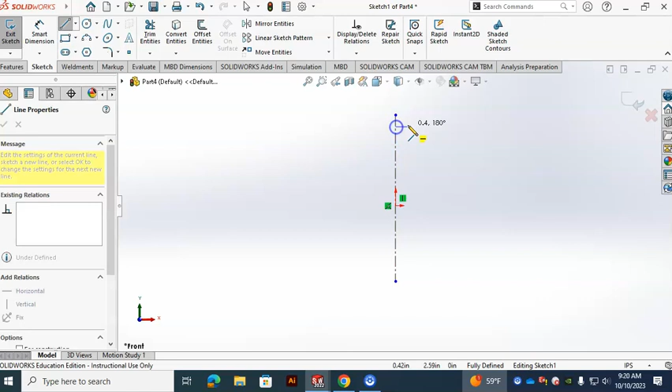Alright, first thing you want to do, front view, we're going to make a vertical line on the origin. We're going to put in a horizontal line for the parameters of the top and of the bottom.

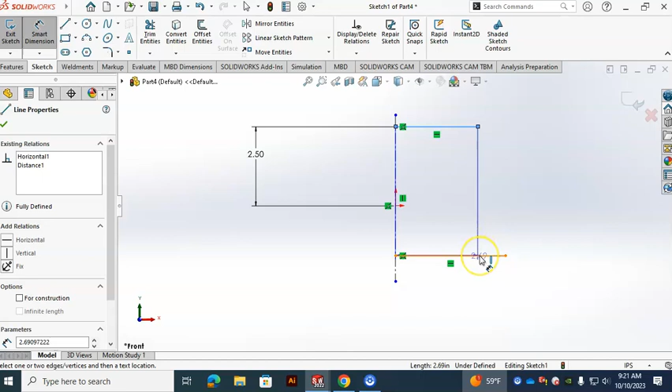And our dimensions, put this one up 2.5 from the origin, which will be the center of the circle here in a bit. And then this is the overall height of 5.125.

This here circle has a diameter of 3.25. Right? And then what I want you to do is place all the circles and then treat all these fillets

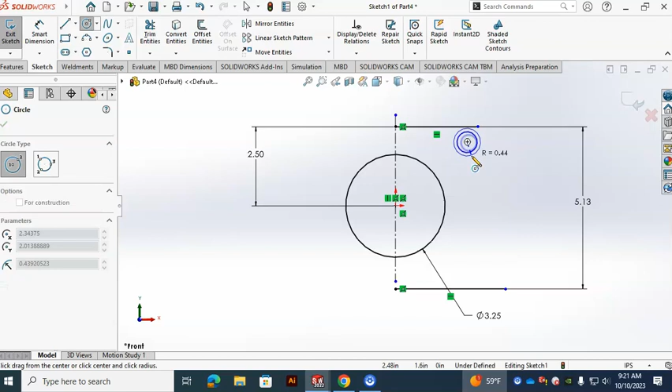as a 0.5 radius, but actually we're going to put them in as 1-inch circles. So you're going to have 1, 2, 3, 4, 5, 6.

All right, now this, and this are all 0.5 radius. But for now, we're going to make these all 1-inch diameters. We'll trim them out later.

I'm going to have to zero it out. The center point for this, it has it located. It wants this to be tangent. And then we will go measure over, since it's symmetrical, 3.5.

The inside diameter is 0.562. Now this line here needs to come out. It's going to line up with this, and we'll trim it out here in a bit and it'll make more sense. This part's all fully defined.

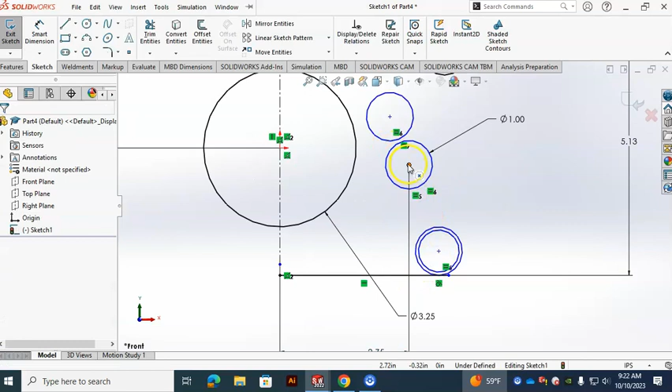Right? These circles, if you look down here, are going to be 2.749. Now the other circle didn't follow it because we haven't made a relation to make those vertical. So now they're going to be on the same vertical line.

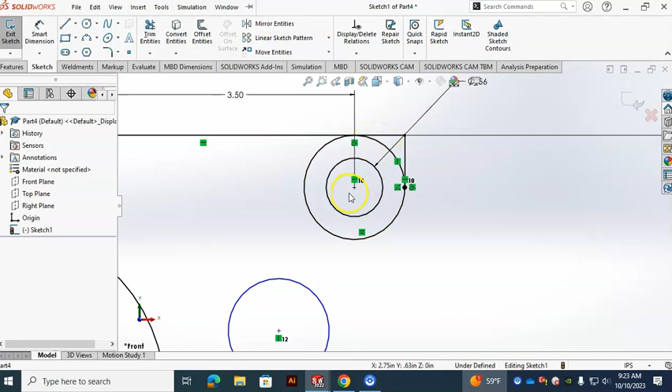Right? We don't have to put in this 0.5 because we've already made it tangent, and that's a 1-inch diameter. We will then measure from this center point to this center point, and that needs to be a 1.165. This one needs to be a 0.5.

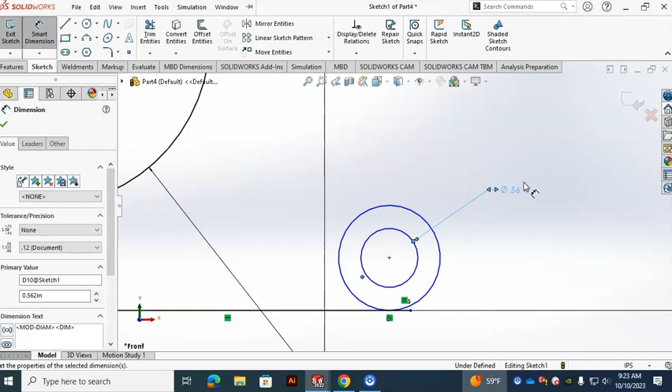Right? This one should be 0.562. It's tangent. This one's going to stop here. And the distance from that center point to this vertical line is going to be 4.125.

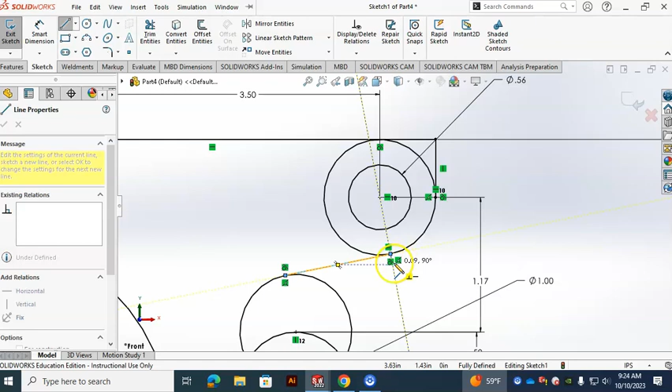Now we have fully defined circles. We are now going to make tangent lines. So now I'm in the line tool, and what I'm going to kind of do is just kind of graze that, and you can see it being tangent. When I do it that way, it made it coincident and tangent all in one stroke.

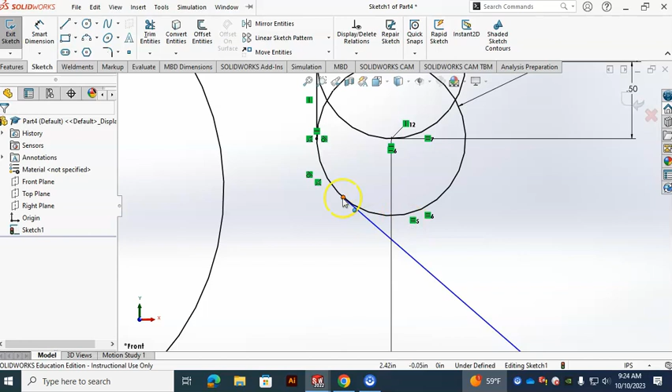These will be tangent from here to here. Then we'll see what we can do here. If we can make this one tangent. Doesn't look like it's going to let me do what I want. So we're going to have to, that one is tangent and coincident. This one is not. We're going to make that tangent.

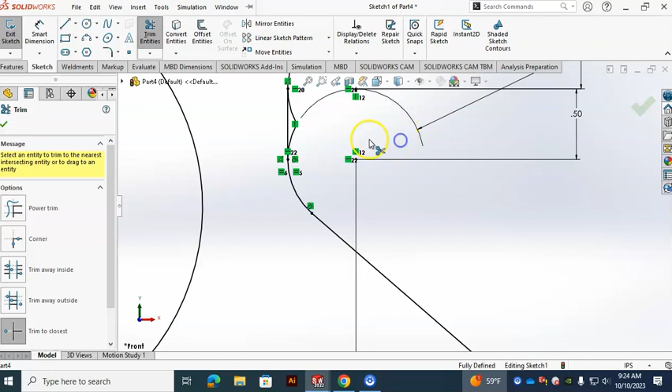And then with my trim tool, using the trim to closest, I click on what I don't want. I don't want that. I don't want that. I don't want that. I don't want that. And that needs to go, and that needs to go.

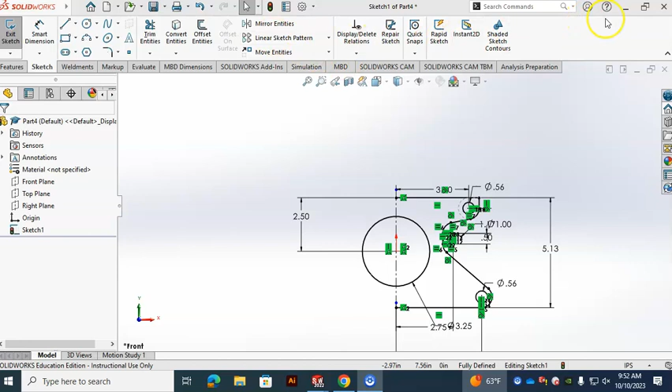At this point, I now can mirror this and have 90% of that drawing done. This would be a good place to run the mirror tool. Move that out of the way. Mirror about the vertical. Then you can window in all of this. And that'll get you to this point.

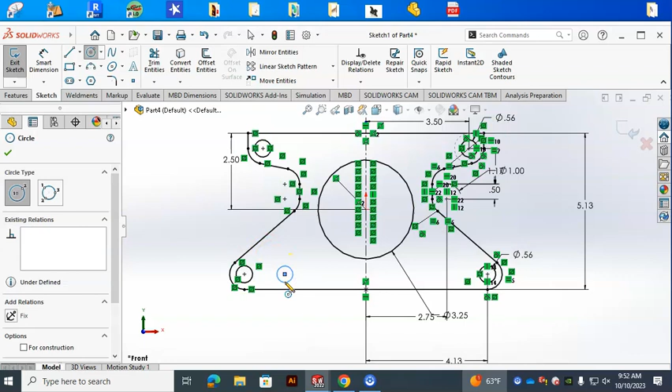Now you got to add a circle down here. We are going to smart dimension that at 0.75. And it has that listed from that center point to here at 1.812.

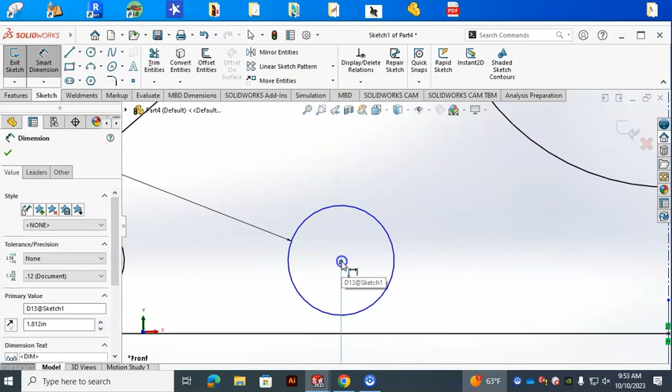And it needs to be, let's zoom in here, from here to here. Need to make sure I zoom and get that center point there. From here to here, they want that to be 0.562.

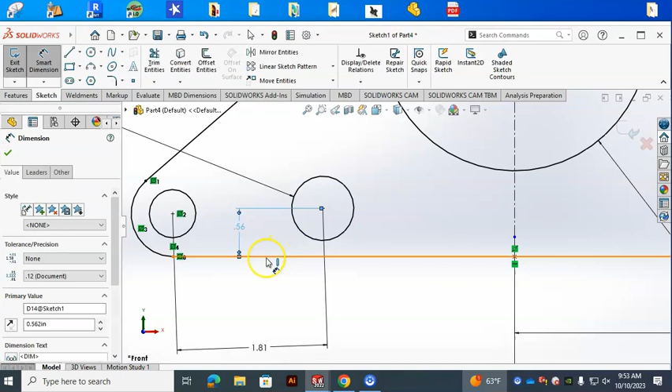Now that's defined. Now down here, we're going to do an offset at 0.125. Not a chain. And I'm going to go in that direction. And we'll turn that one back into a, some reason it wanted to make that into a construction.

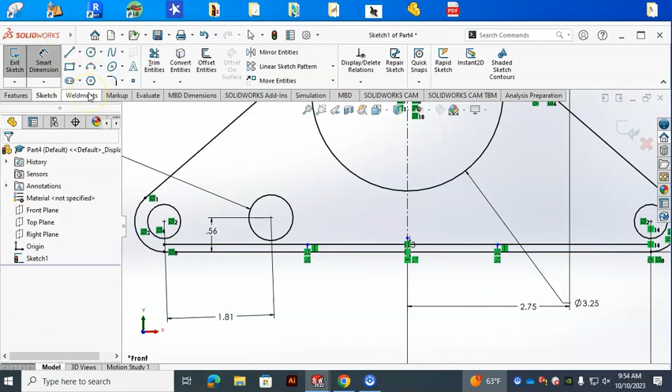There is a vertical line. We could have done this in the mirror as well. But the dimension for that is from here to here is 1.875. Same thing over here. Since we didn't mirror it, 1.875.

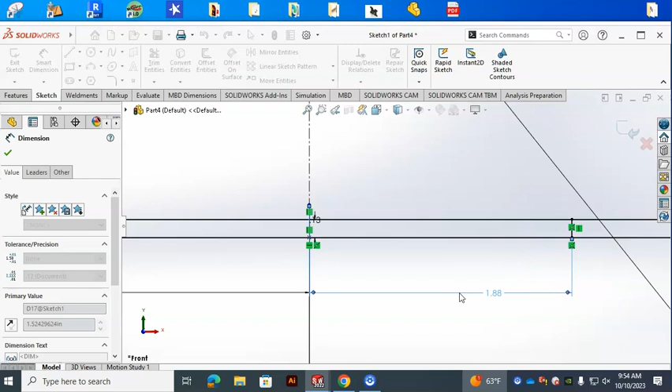And then I'm going to do some trim. I'm going to trim that out, and then I'm going to trim this out. And I'll just run this to here.

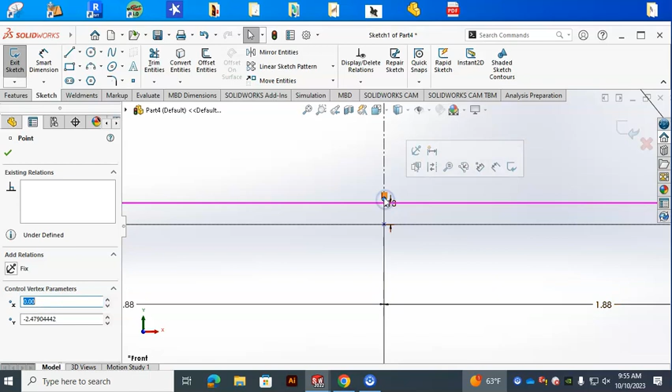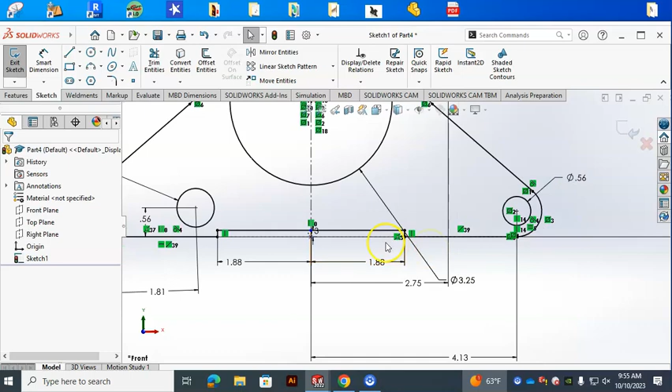So what I'm going to do here is I'll do a 3D feature fillet once it's extruded. To make this piece over here, I'm going to make a construction line or center line. Those are synonymous. I want to make that at 28 degrees.

I'm going to put a circle on that. That says a radius of 0.25, which would be a diameter of 0.5.

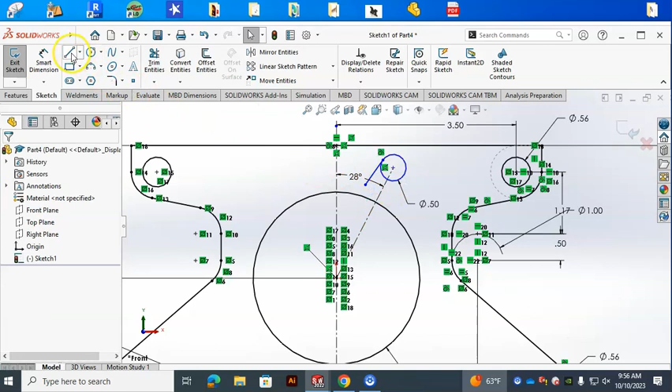This is how I'll do these. I'll come make sure that I have those lines on here. Make it concentric or coincident with the circle. Then I'll make these parallel.

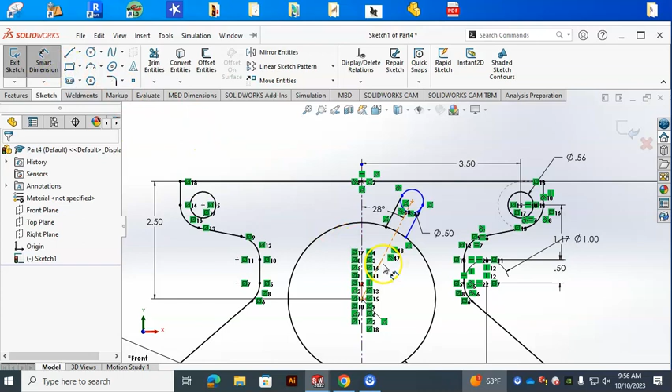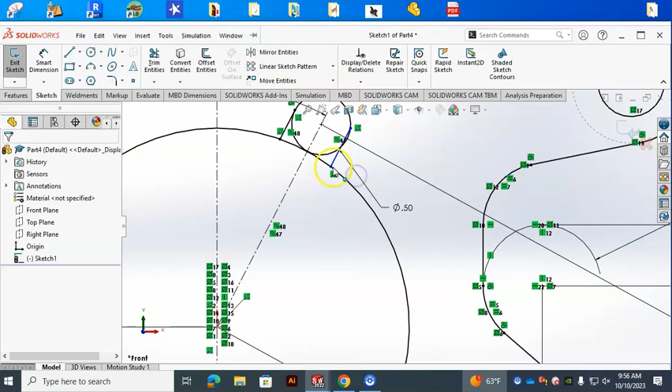Right, and then the distance on this guy, which is technically the radius, is 1.875. And we need this to be tangent with that. Then we'll do our trim. Alright, we should be good there.

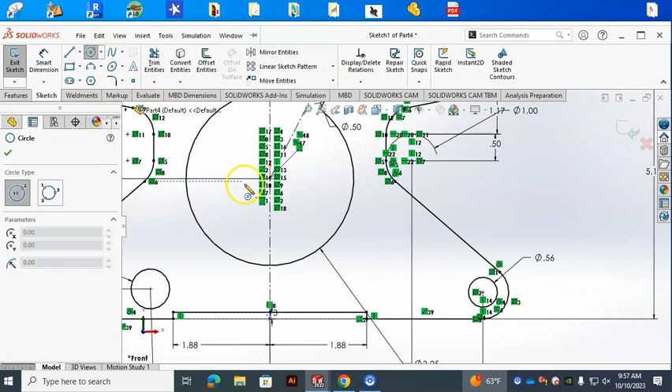This over here could also be done with a circle through the center point. And if you do that, I would make this a construction. And then we make our diameter up here 0.5. Oh, we already have it here.

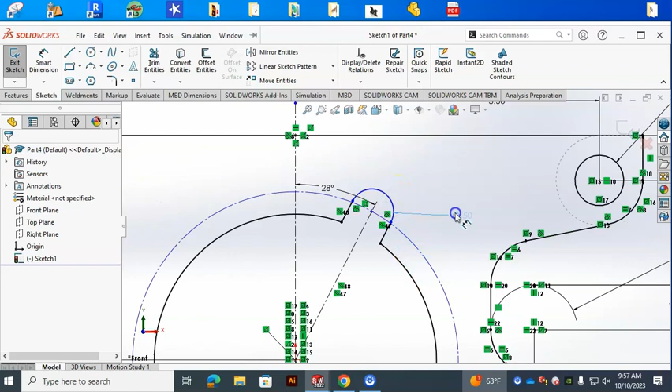I would turn that off. Put this in here at 0.25. Alright, and why is that still blue? Because our center, this needs a diameter, which would be 1.875 times 2.

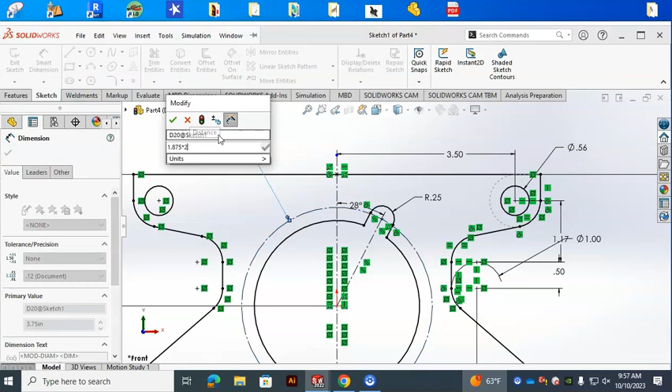That's fully defined. I can then now do my features. I believe this is 1 inch thick. And I like to go that direction. Right? And keep in mind we need to put these fillets in here.

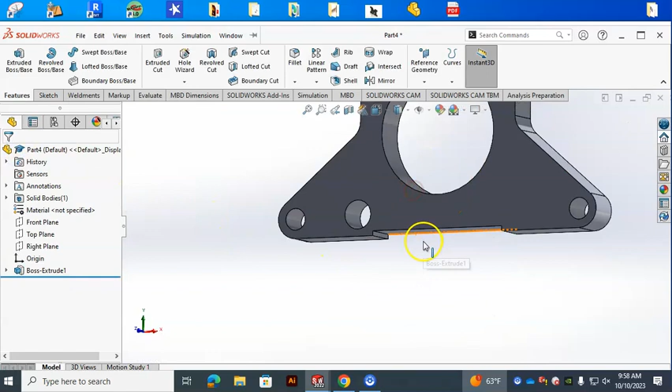And those fillets are going to be, alright, what's going on there? Fillet.